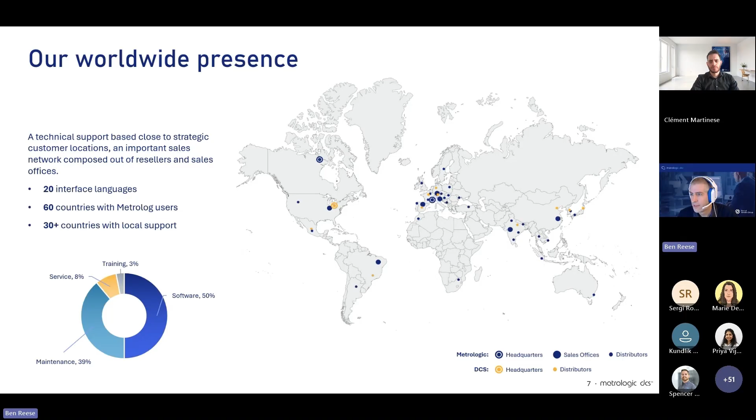It also means that we have a larger worldwide presence so that you'll be able to get services, training, expertise, and help locally where you are and in your local language. Together, we service every manufacturing industry from aerospace and defense through power and energy, consumer electronics, shipbuilding, even fusion and power creation with the ITER project in France.

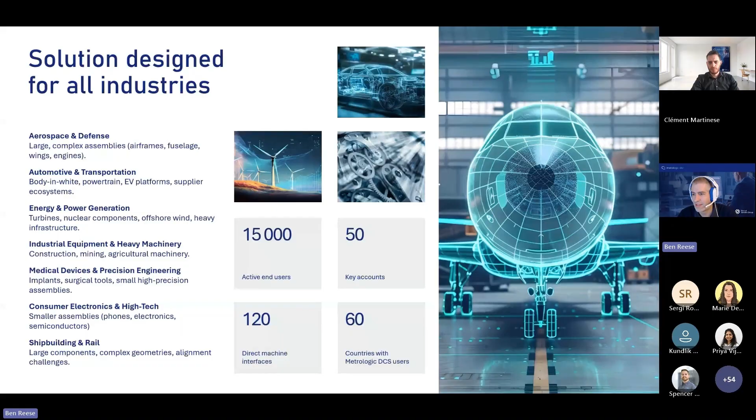And what we are going to be providing now as a combined company is a complete end-to-end solution from the design all the way through to manufacturing. And what this looks like, if I can get our GIFs going. There we go. What this is going to look like for you is the ability to optimize your designs early in the process, showing you not only where you might have risk factors in your product for manufacturing, but also showing you where you can optimize and make improvements.

This being fed into Planner, which is what today we'll be focusing on, will allow you then to set all of your inspection based on your model, following along that model based enterprise approach. Silma, of course, offline inspection and programming and simulation, and then Metrolog, as all of you have come to expect, will still be the powerhouse it is for inspection, reporting, and single part analysis.

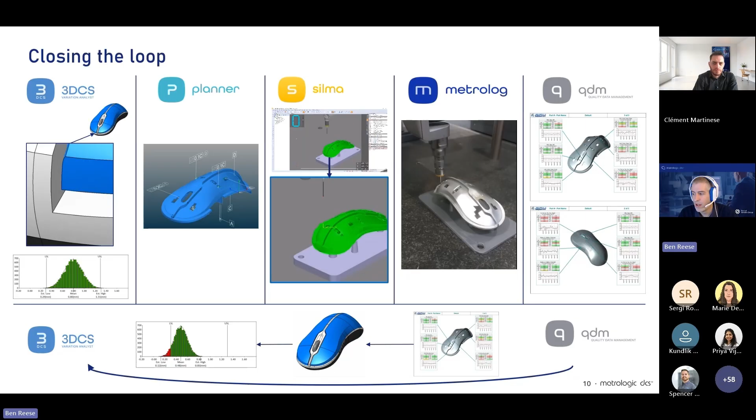And all of this data can be fed up into QDM or Quality Data Management Program, which then allows you to monitor it in real time, create reports, dashboards, even inline inspection screens so that as you're producing parts, you can see in real time whether they're meeting your specifications or not. And this can be fed back into 3DCS for root cause analysis and problem solving, utilizing that digital model.

Today, we've got two presenters to showcase the first part of the end-to-end solution, the 3DCS and Planner portion. Vishnupriya Vijay Kumar from our technical support team focused more on 3DCS, and then Clément Martinese, application engineer from the Metrolog side, will be showcasing Planner today for you. All right, so this time I'm going to let Priya take over. She's prepared some material for us to showcase exactly how 3DCS is going to prepare these components for inspection.

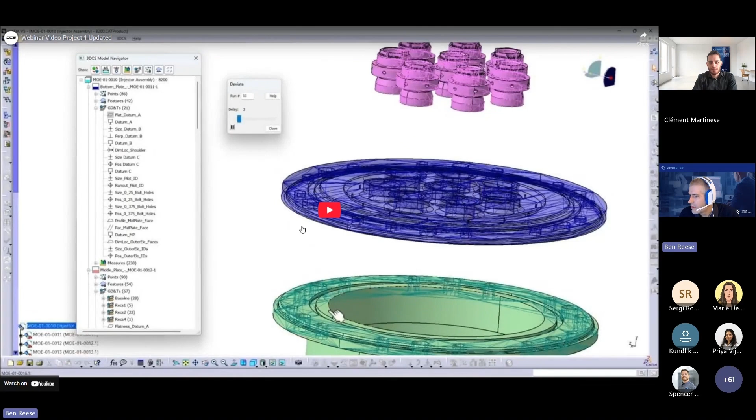Good morning, everyone. I'm Vishnupriya. So I'll be doing the 3DCS software demo today. So before we get into the actual demo, I have a couple slides here to go over to get you familiar with our 3DCS software. So what is 3DCS Variation Analyst?

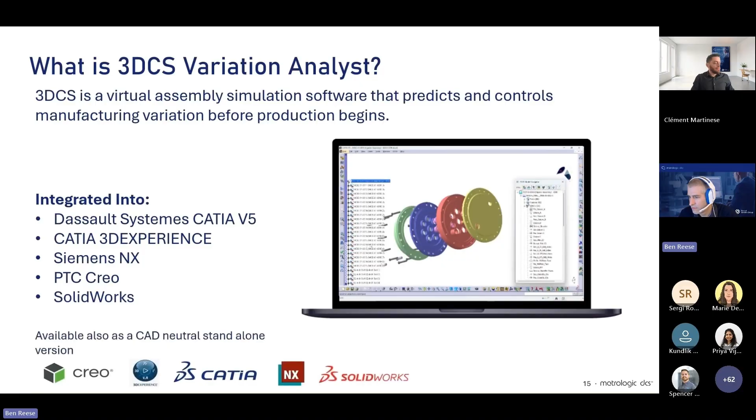So 3DCS is a virtual assembly simulation software that predicts and also controls the manufacturing variation even before the parts or the assembly get into the production level. As a software, we are integrated with the leading CAD platforms, which include CATIA V5, 3D Experience, NX, Creo, and SolidWorks. And we're also available as a CAD neutral standalone version.

So why do we use 3DCS? To explain this, it's nice to have a real example of a real world challenge of variation. No part is perfect. Any part that's output from production will have variation on the features, which includes holes, pins, surfaces, or fixtures. When these variations stack up, it leads to a lot of rework and scrap, because all the failures end up as scrap parts. And when you have to do a lot of rework, that delays the overall production process, which ends up with a lot of customer complaints.

So what's the real challenge here? These issues that we discussed are often discovered after the parts are built. So at that point, when you're trying to do any changes or rework, it's going to double the cost. And also you can't meet the timeline. This is exactly where 3DCS comes into the picture. All these failures can be predicted and this variation can be controlled with our software even before the production is actually started.

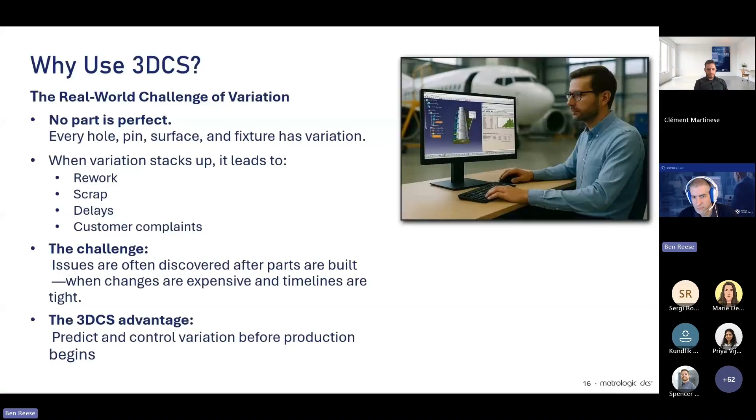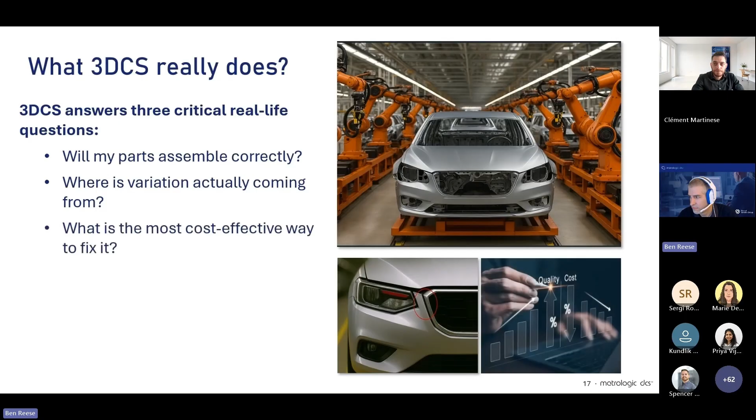So what does 3DCS really do? 3DCS answers three critical real-life questions. The first one, will my parts assemble correctly? If not, where is the actual variation coming from that's affecting my assembly failure? And third, what is the most cost-effective way to fix this without compromising the quality?

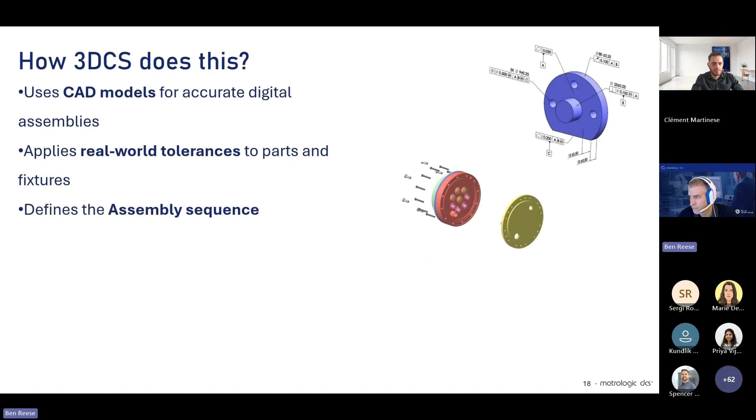So how do we do it? We get the CAD model for accurate digital assemblies. We apply the real-world tolerances to the parts and fixtures. We also define how the parts need to assemble by mimicking the real-life assembly sequence and run the statistical simulation, which is the Monte Carlo simulation, to mimic thousands of realistic builds. And finally, we provide the visual results and also the contributor analysis, where we pinpoint exactly where the problem is happening even before production is started. With that said, I'm going to switch to the demo.

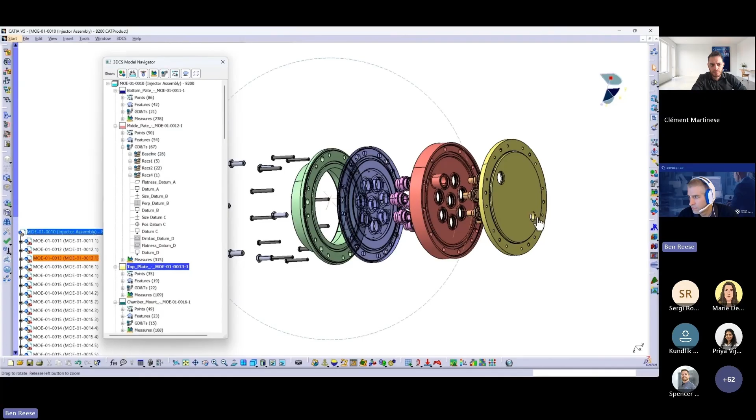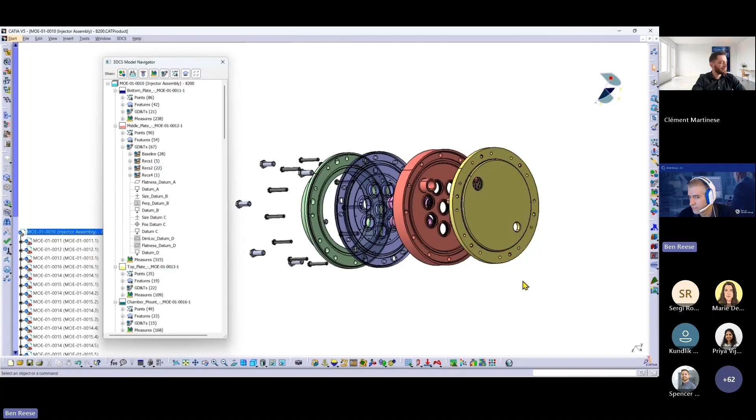All right, so I have 3DCS here integrated with CATIA V5. The 3DCS software comes as an analysis add-on workbench. For this demo, I have an injector assembly where we get the geometry from the CAD. This is a CATIA model, but this applies to any CAD platform that 3DCS is integrated with. We get the geometry from that respective CAD. Once we have the geometry, we start to add the 3DCS data, which includes the tolerances, the assembly sequence, and the measurements. All this information is added through the 3DCS tool.

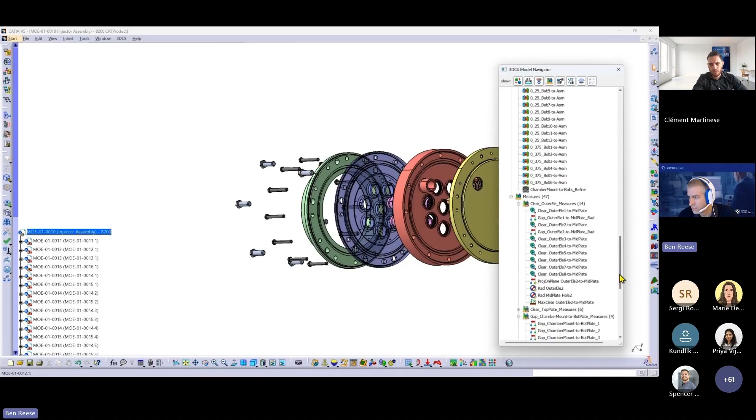So first, we have this 3DCS model navigator. In general, this mimics your CATIA tree, where we get the tree structure and the part name information from. And now we start to add our 3DCS data, which includes all these subfolders that you see within the part, where you can see the GD&T, the measurements, the moves, and a bunch of feature folders. These are all the data being added by the 3DCS tools.

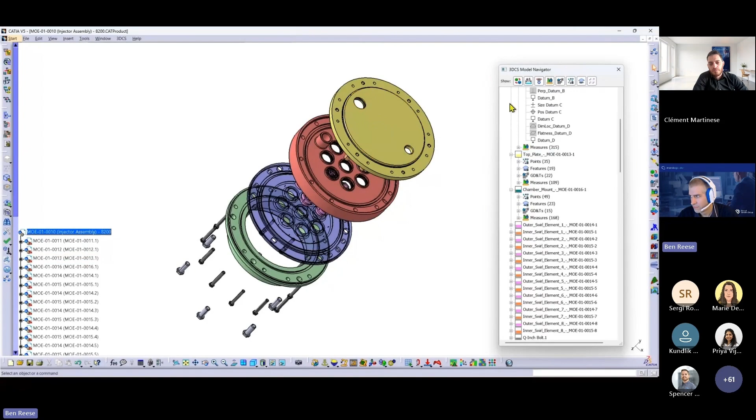When I say we add the 3DCS information, whenever a CAD surface is selected from the geometry, we create a mesh on that surface and we use that mesh for our analysis. To show that, if I turn on the mesh, now you can see these lines on all the CAD surfaces. These are the analysis mesh that 3DCS creates on the actual CAD surface, and we use that to simulate and produce our final analysis results.

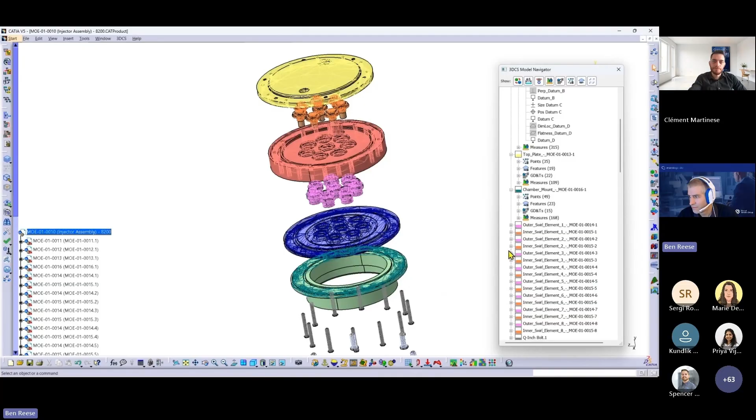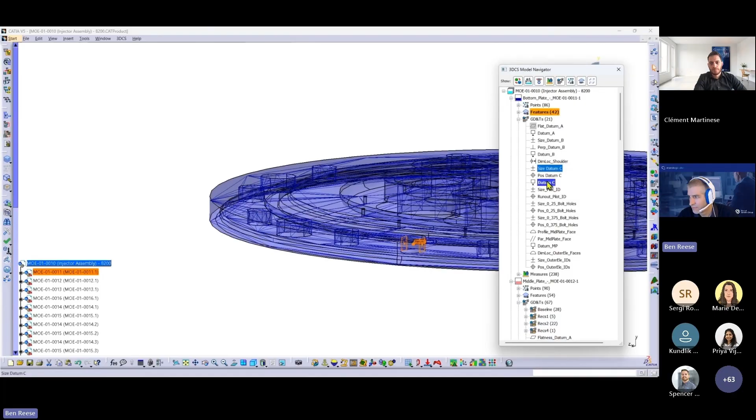To understand this more clearly, if I zoom into one of our parts here, and go into the GD&T folder of this part, I have a bunch of GD&T defined for this part right here. You can see by clicking on a GD&T, it highlights that mesh on this part. For example, if I open one of these GD&Ts, I have defined a surface profile on this with a range of 2.54.

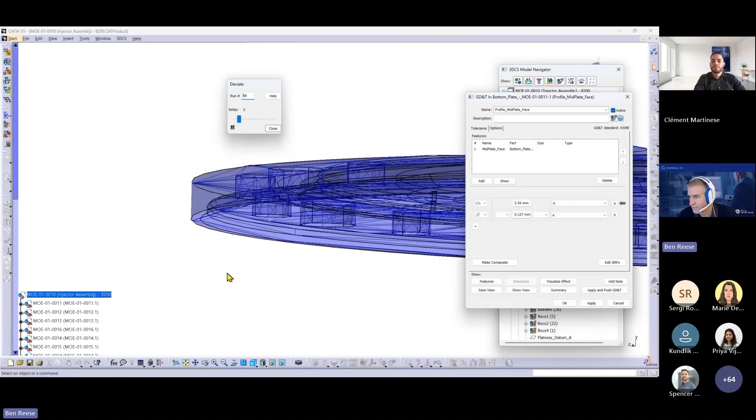If I zoom in here a little bit and hit deviate, it's going to show the variation that I have applied in the GD&T dialog visually by showing how that mesh is going to vary. In this way, a user will have an understanding of how that specific feature will vary for the applied GD&T.

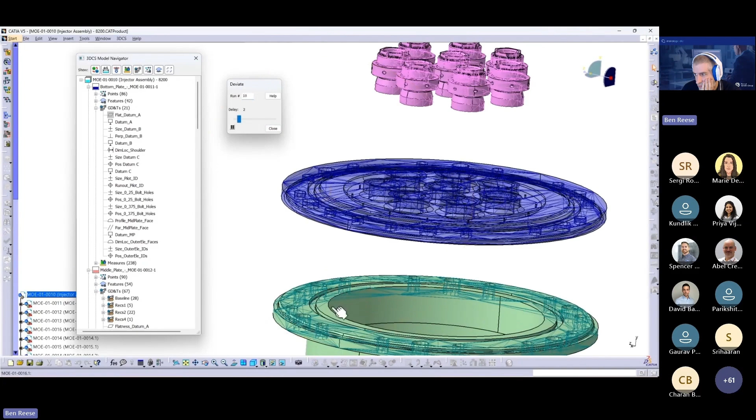So then similarly, if I zoom out a little bit, close this dialog, get this out of the way, and deviate it again, you can see the deviation is happening on all the surfaces that have variation in them. So now if I come in here and zoom into these surfaces, I can see there is a variation being applied on all these meshes. So wherever the mesh is moving or deviating, you can tell that these surfaces have tolerances defined by 3DCS.

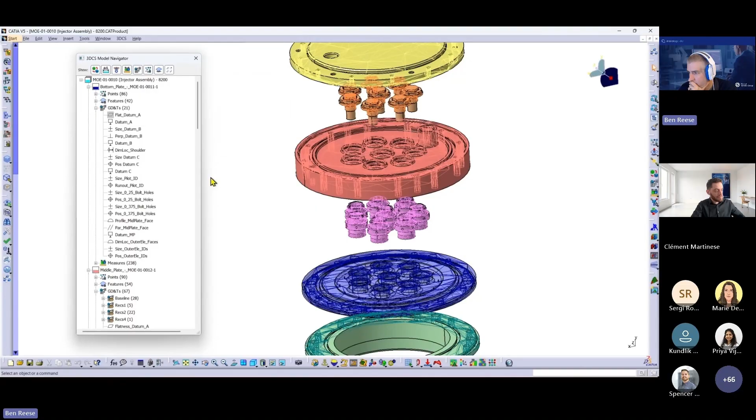So now after I have the 3DCS, I have the tolerance defined. So the next step is to define the assembly sequence. So here, if I come down in the tree, I have a folder that's called moves, where I have defined all the move sequences telling how the parts need to assemble with respect to one another.

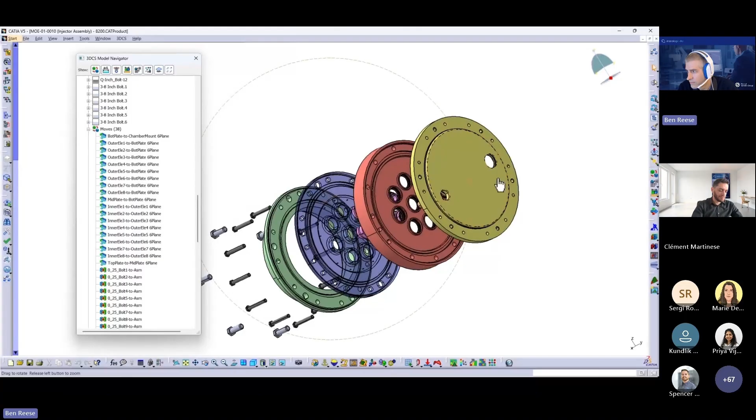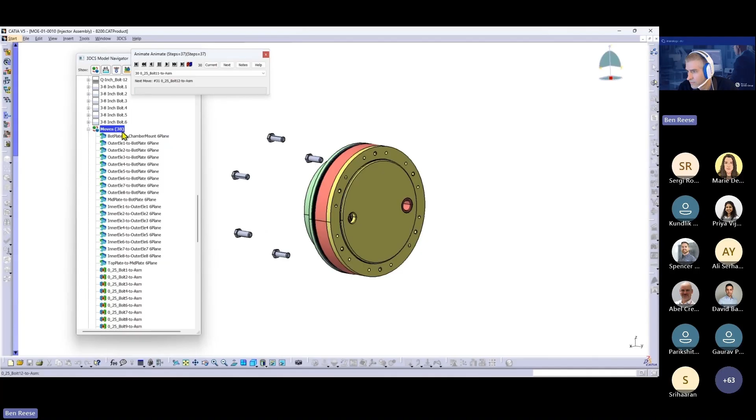So if I come in here, I hit the animate button. This will visually show you how the move, or the assembly sequence, has been defined within 3DCS. So what you see right now on the screen is nothing but the animation of all this set of moves that's been defined here within the move section. All right. So that's how the parts are getting assembled, and this is mimicking your real world assembly sequence.

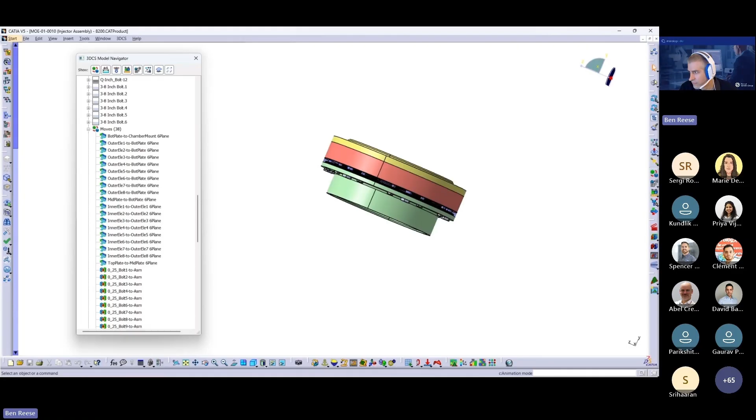So with that, the next thing I've created is the measurements. So now I have assembled the model, and I have the tolerances defined. So now I want to check if my assembly is building and meeting the expectation by creating some measurements for the specific measuring locations. So for that, if I separate the parts and go down in the list further, you can see these are the list of measurements that I have created. By just clicking on each measure, it shows where the measuring locations are.

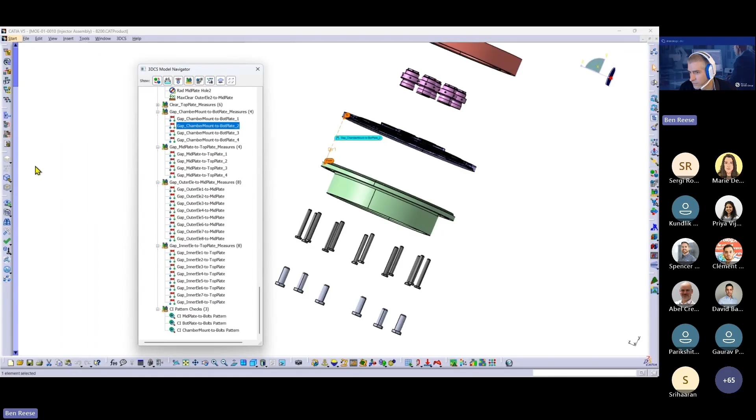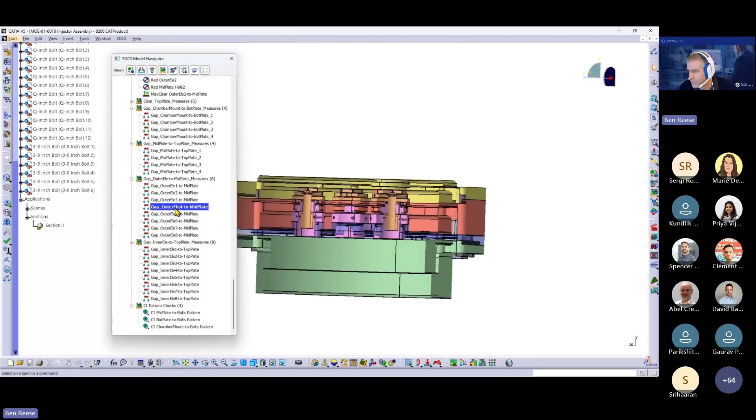But if I had to pinpoint one specific measurement here, I need to just take a quick cross section of the model. If I come in here, all right. So now if I assemble the model back again and get to one of the specific measurements, I'm trying to get to the gap measure here between these two parts. So if I zoom in here, I'm looking for this gap between the orange part and the pink part.

So at this position, if I deviate, you can see the gap between the orange part and the pink part growing and shrinking. So this is the mesh. This is the gap I wanted to check. And checking meaning I wanted to know that there is no interference going to happen between these two surfaces.

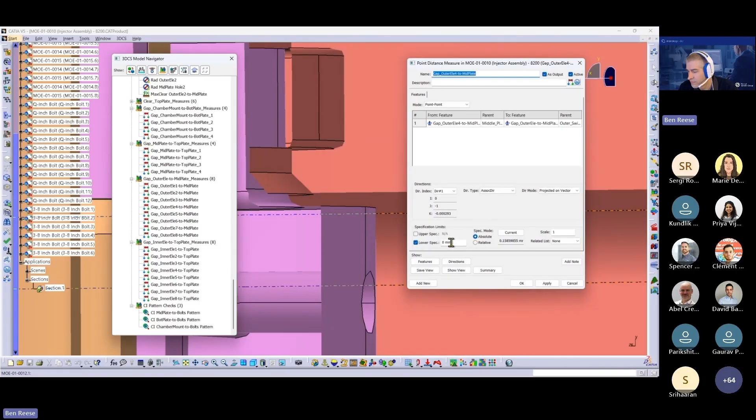So if I get into this measure, the measure dialog tells me the features that I'm using for this specific measure. And down at the bottom are the specification limits, and I have defined that none of my builds should go beyond 0, which means that no interference should happen. So this is what I'm checking by this measure.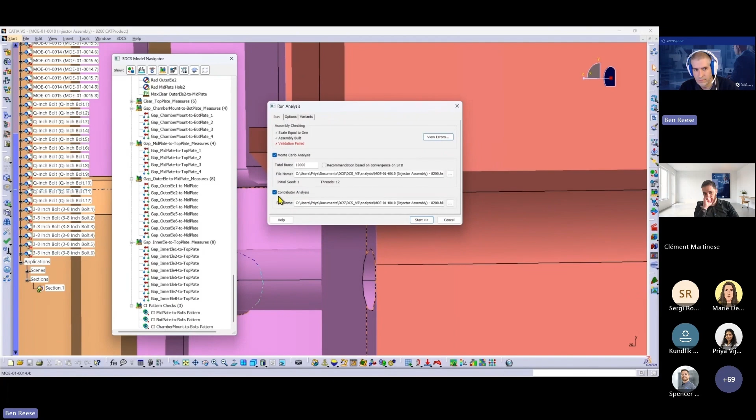So with that said, if I come back here, I'm going to nominal build and run the analysis. So this run analysis dialog is going to run the Monte Carlo analysis and also the contributor analysis. The number here that I have specified is going to mimic the number of realistic builds of the assembly, but I'm simulating it virtually by doing this analysis. So if I go ahead and run this,

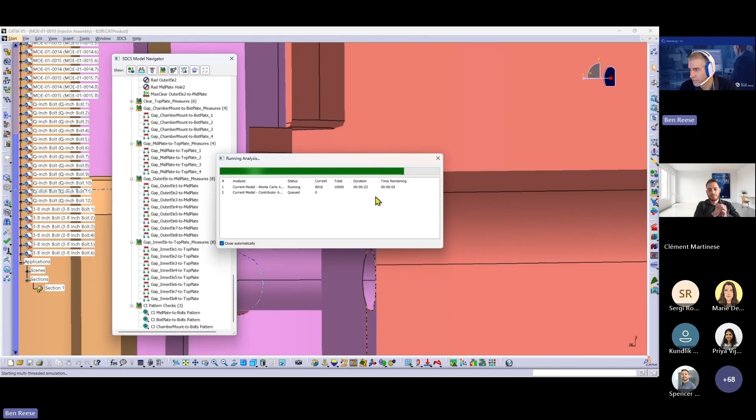all right, so now I have the analysis results for all the measurements that I have in the model. So if I go into the one that we are looking for, it's the gap measure between the plates right there. So for this measure, what the results are saying is, out of 10,000 builds that I ran, 17% of the builds failed, meaning I see a clash happening and the two surfaces were interfering 17% of the time. So this is what our Monte Carlo analysis results are saying.

And down at the bottom, we have the contributor analysis. This is nothing but listing out the tolerances or GD&T that were contributing to this specific gap measure. So the first one in the list is the top contributor, and you can see the percentage is gradually decreasing, meaning these are the impact of each and every tolerance on this specific measure.

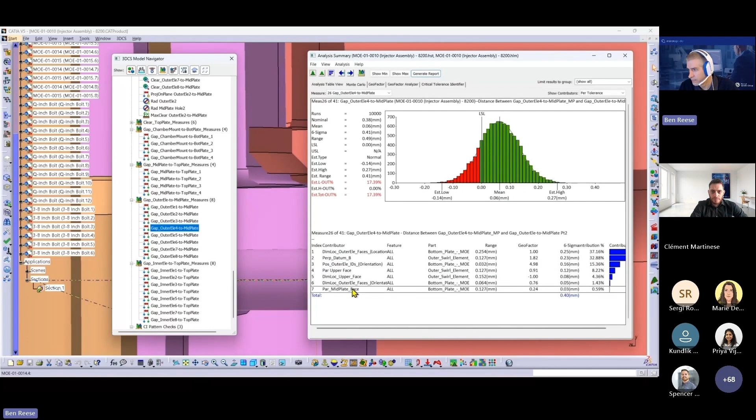So this is the information that we give to the user, from which the user can now decide how they want to take it forward. So if you want to improve your results by reducing the number of failures, the user can go ahead and tighten up the tolerance and give this information back to the design.

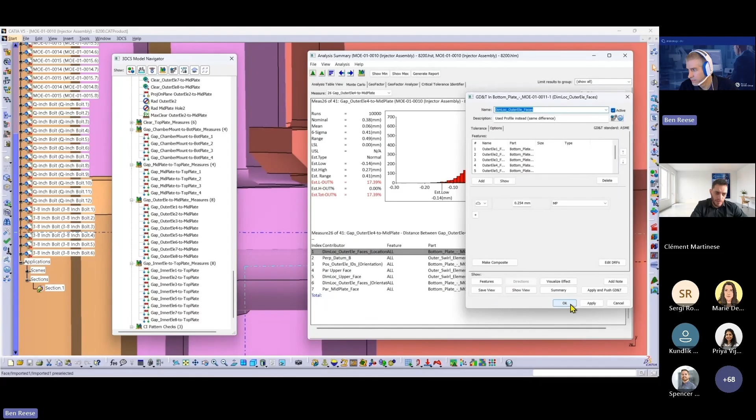So when this information is fixed, I go back to the model, go here. And now the reviewed and updated GD&T information that we got after running the analysis from 3DCS, this data would now be updated within the part. So now the part GD&T information would be updated based on the results that we got. And now this fixed part information would be given to the production team for the next step. So that's where I end my demo.

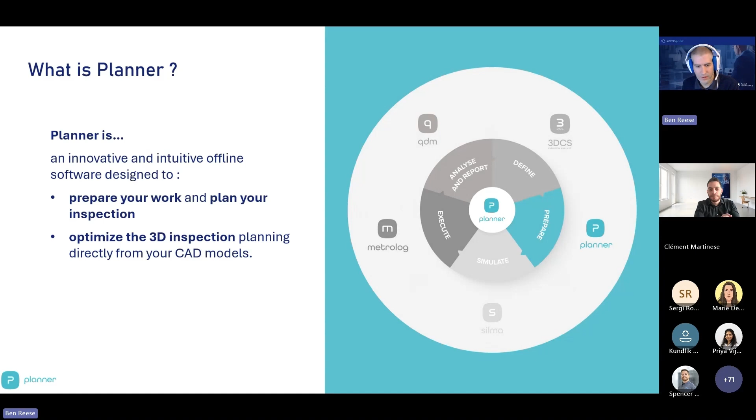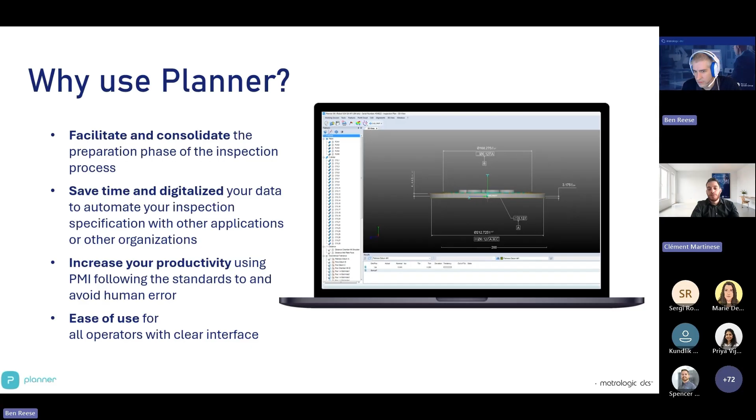So the first step when you open Planner is to open and import your CAD. You are able to import any CAD file. You are free to import any CAD format to stay fully compatible during your inspection flow. You are able to work with Creo, with IGES files, with CATIA in this example, SolidWorks maybe. So next slide, please.

So now when the CAD is open, the next step is to define all the characteristics to measure. Reminder, we are close to the design department, so we know what characteristic is important for my inspection. We have 2 solutions. The first one is to use a CAD with PMI. You just have to decode all the PMI, so you will get all the characteristics, all the datums, all the GD&T, and maybe all the views. If you have a view designed in CATIA, you can decode easily in one click all the features.

If not, it's not a problem. You just have to define yourself all the cylinders, all the planes, all the datums, all the GD&T from the 2D drawing, and you have to set all the information you need yourself. Next slide, please.

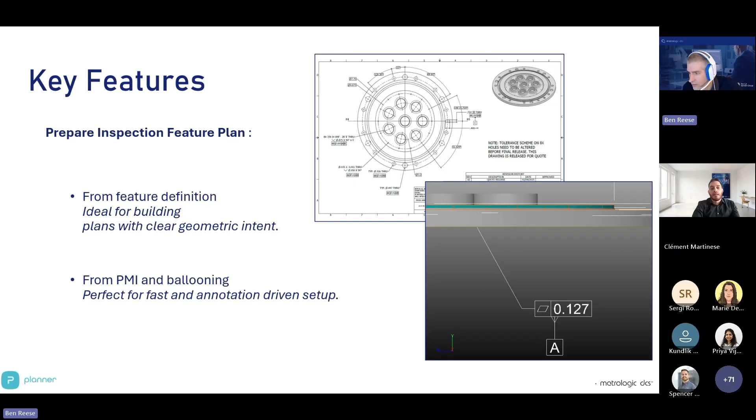Now focus on GD&T, it's an important thing. We have a clear interface to create your own GD&T. We have quick access to the standard to use, to the tolerance, to the calculation to set. And we have a window automatically updated depending on your setup. So it's easy to understand what's happening in the 3D in the window. And sometimes we think it could be not easy, it's complex to understand.

So we give you the possibility to check with the features relationship all the information about your GD&T, about the datum, depending on your GD&T. As you can see on this screen, you have the position GD&T, and you have all the information, all the datum, all the planes and cylinders depending on this position.

And we have also the scan GD&T to see the result at the end of the inspection, to see if the GD&T PMI is semantic or not. And at the end of the inspection, all the GD&T results will be in this area.

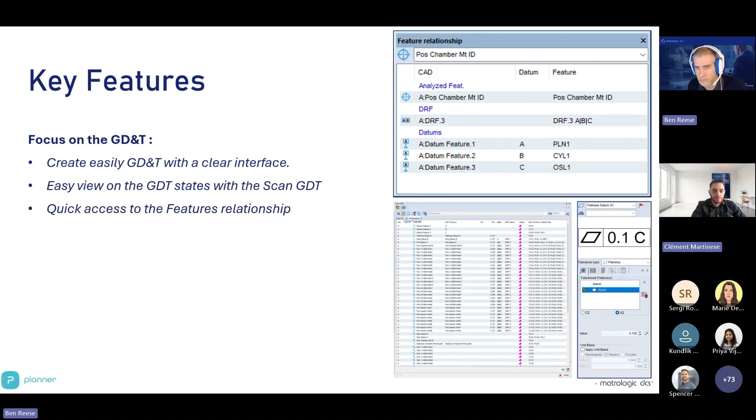Next slide, please. Thank you.

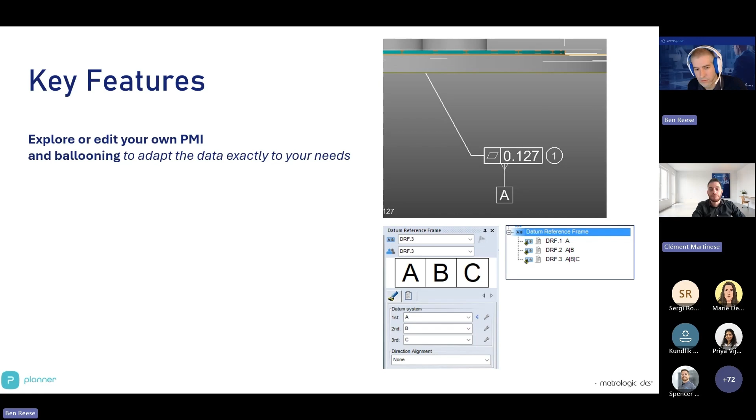As I said before, if you don't have PMI on your CAD, it's not a problem. You can create your own PMI easily with Planner with only one click. So the first step is to create maybe a plane, assign a flatness to this. And at the end, on the flatness, only one click to create the PMI. And you can also create the ballooning associated to the PMI to add, for example, a chart number, very important for the manufacturing process.

So now about the alignment, you can create with Planner all the alignments you need. It's automatically updated on the 3D view. So for example, you can create an alignment on a plane and circle and move, for example, the orientation on X, and it will be automatically updated on the 3D view to help you understand what's happening.

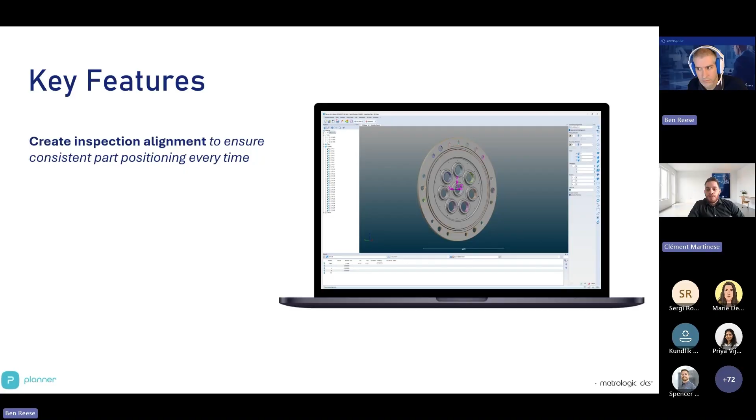It's time now for the first demonstration with Planner. So you can, yes. Thank you.

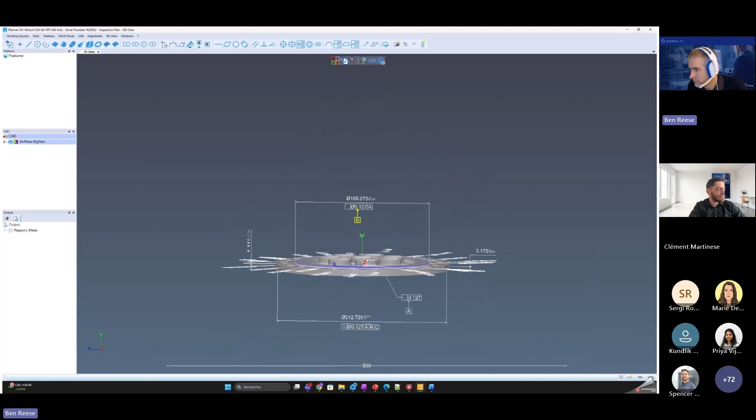With Planner, import any CAD file, any data such as CATIA, SolidWorks, NX, Creo, STEP, and so on. This keeps your workflow fully open and compatible. The CAD is instantly loaded with all PMIs if your base file contains them. Increase your productivity using PMI following the standards too, and avoid human errors. With the inspection plan collector, decode with only one click all the features, GD&T, and views. All the features are now in the features database.

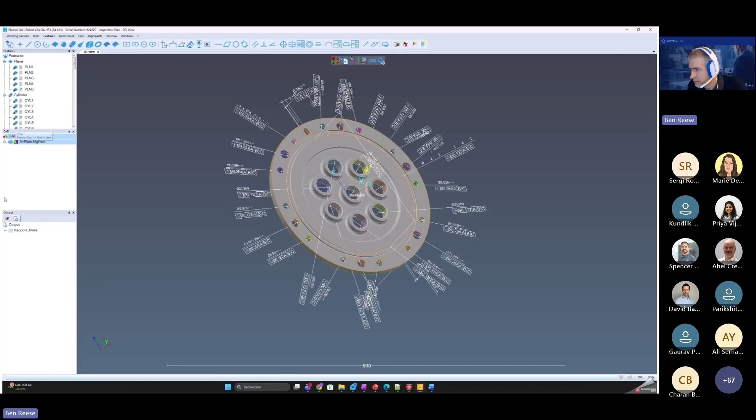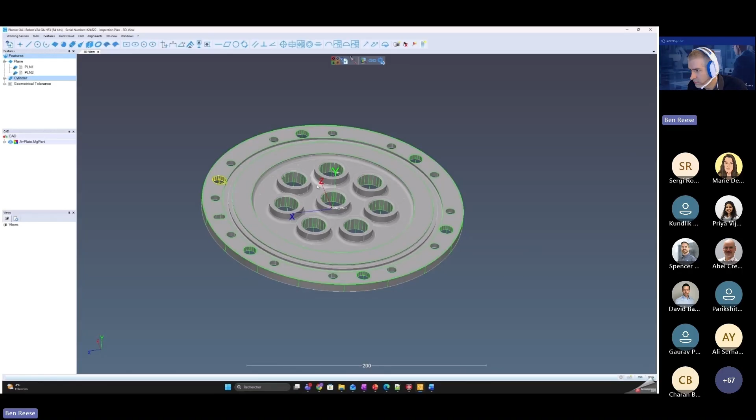If you don't use PMI now, don't worry. Define manually all the features and characteristics that you will measure next. Define the type of features and simply click on the CAD and the job is done. In order to comply with the 2D drawing specifications, easily assign a datum to your features. Here, let's assign datum A to my plane 1, for example. Select from the list which tolerance to create, and you are free to choose the elements in the 3D view or the database.

Now let's focus on the tolerances module. Easily define your tolerances either from the list or from the tolerances menu. Easily define your flatness, circularity, and position tolerance. Click on the 3D view or in the database to select the tolerance elements or your references. You have control over the tolerance value, the association criteria, such as least squares, Chebyshev, etc., and all other calculation parameters. You are in full control of the process. All the GD&T are available in the features database. Edit them at any time if necessary.

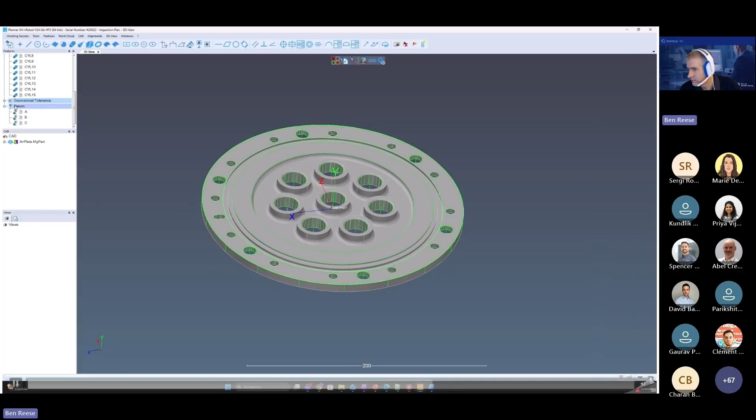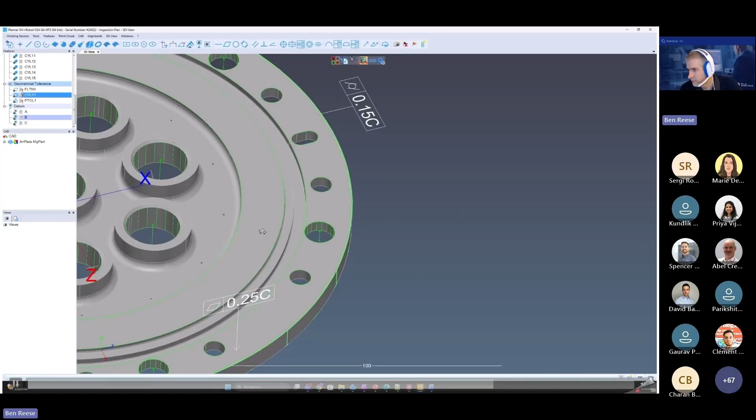With Planner, add PMI, Product Manufacturing Information, with only one click. For better visibility, add the datum and tolerances attached on your CAD. For even faster comprehension, add ballooning very easily. Ideal for finding your way around later. Relaunch an inspection plan collector so that the number is correctly decoded. You will find it in the results window attached to your item.

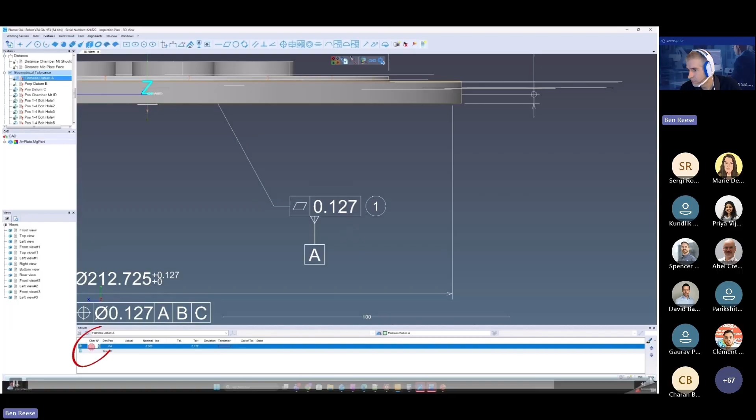Create any alignment with Planner. Based on reference features, orient and position your alignments so that everything is ready for the programming stage. Find and edit these alignments at any time in the database. The display is dynamic, allowing you to see in real time how your alignment will be positioned on your part.

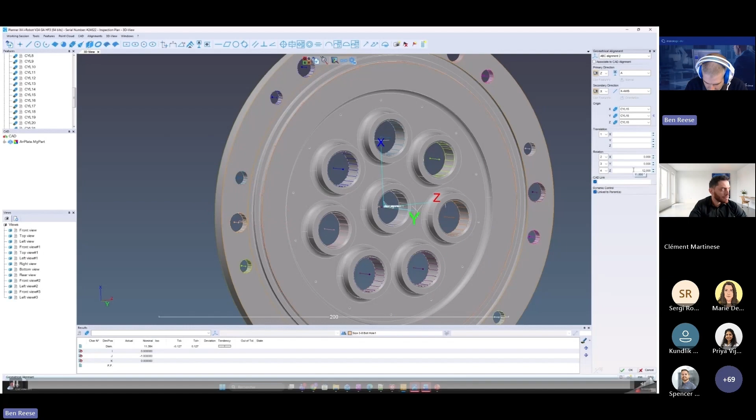Yes, thank you for this first demonstration. Now focus on the prepare view and stickers. As you know, decision making is important. The target is to understand quickly what's happened. So you can create your own view, your own stickers with a detailed view. For example, if you want to understand better what's happened during the inspection, you can create and customize as you want the view and stickers.

For example, create a specific view for all the cylinder results, a specific view for all the GD&T, and add the callout of each GD&T. And as you see at the bottom, in the right corner, you can create a specific detailed view to understand what's happened for your cylinder, and when the inspection is done, the view will be automatically updated with the real result.

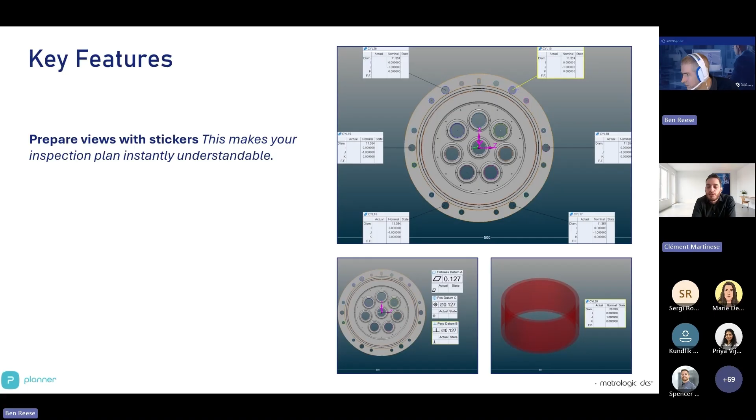Next slide, please, Ben.

And with Planner, you can also prepare your report. You can customize, like the stickers and the view, you can customize as you want. So prepare all your result table, all your background, all your view. And at the end of the inspection, like the view, like the cylinder, the report will be automatically updated.

So you have all the views, all the stickers, all the characteristics, all the reports embedded in only one document. And this document will follow all the steps of the manufacturing process. With Silma on step number 2 for the inspection programming, program creation, and after on what we call step number 3, when you execute your inspection on the real CMM.

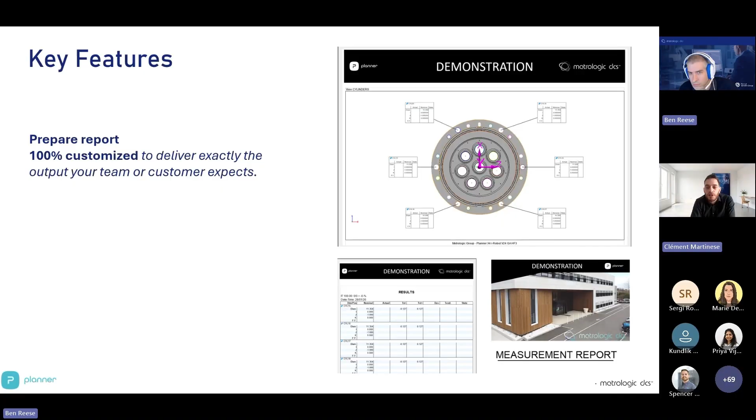Next slide, please. And now a quick focus on the export. So we have two possibilities with QIF. The first one is to open a QIF document with the working session, add some information in this QIF document. So, for example, some GD&T, some PMI, some ballooning. Export with a merge. So we merge all the information you imported before with the information you added with Planner. And at the end, you have an enhanced QIF document.

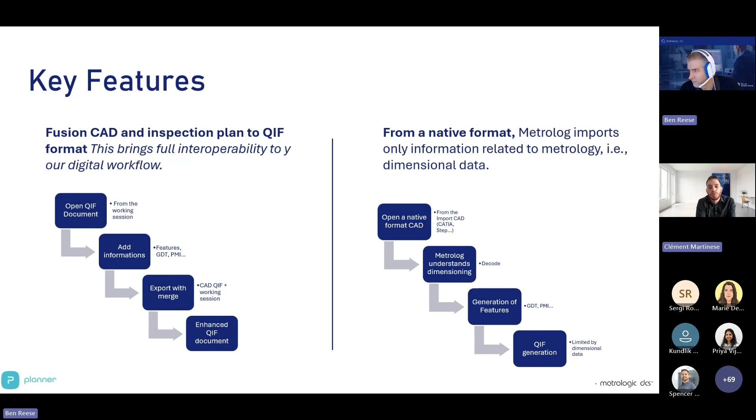Option number 2 is to import a native format, like we did before with the CATIA format. You can, with Metrolog, understand all the dimensioning data. So you decode all the PMI, all the GD&T. You will generate GD&T and PMI in the features database, and you can create a QIF for your inspection later. So we have two possibilities to work with the QIF format.

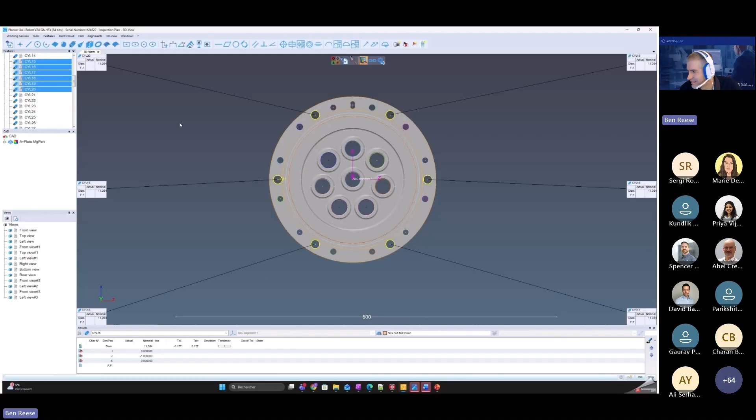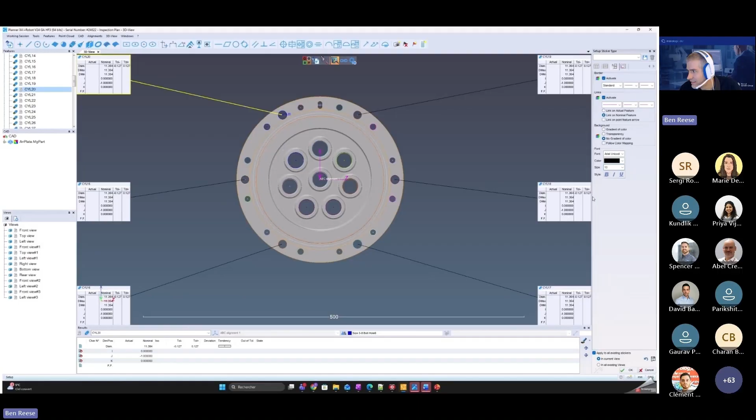Yes, it's time now for demonstration number 2 about the view and report. Planner allows you to create precise stickers and clear views to prepare your inspection report. Adapt and customize each label as you see fit. Drag and drop elements into the 3D view. Edit a label to display the information that is important to you, diameter, shape defect, and apply to all labels. You are free to change the font size, color, absolutely everything. Even save this profile for your future reports.

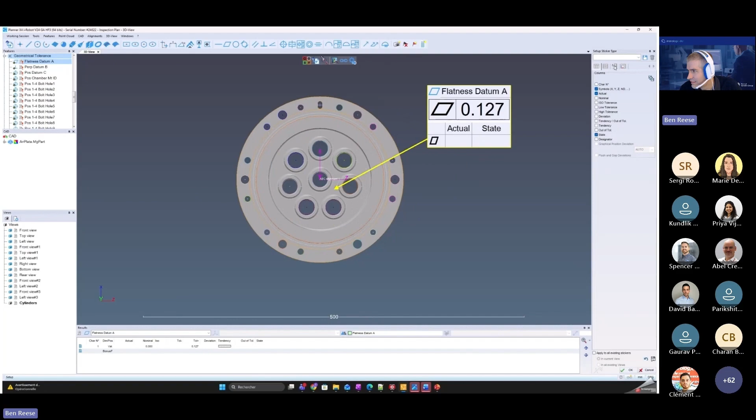When this is done, create a view that will be used for the inspection report. Create the number of views you want for a complete and quickly understandable report. In this example, a view specific to cylinders has been created, but let's also add a view for geometric tolerances for quick decision-making once the part has been measured.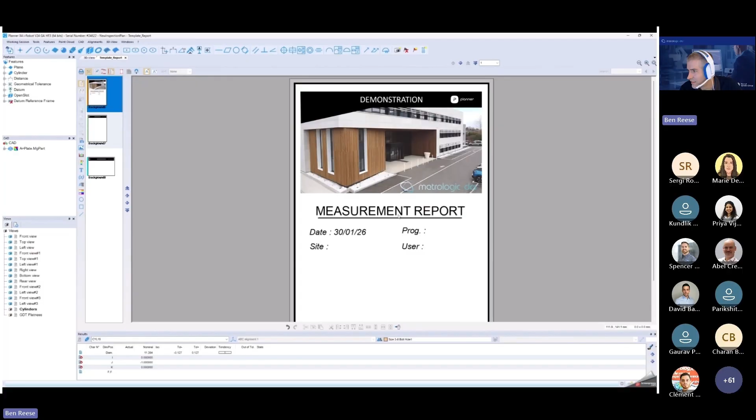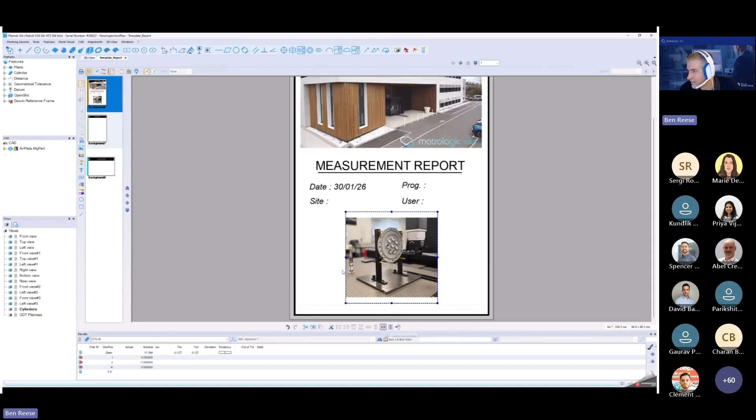One of the final steps is the control report. Here again, you have the freedom to customize the background of your report however you want. Add any photo, any information, any variable. Add the features and views you want and edit the table if necessary to display only the information you want. Drag and drop the desired elements or use the shortcut to generate a unique results table.

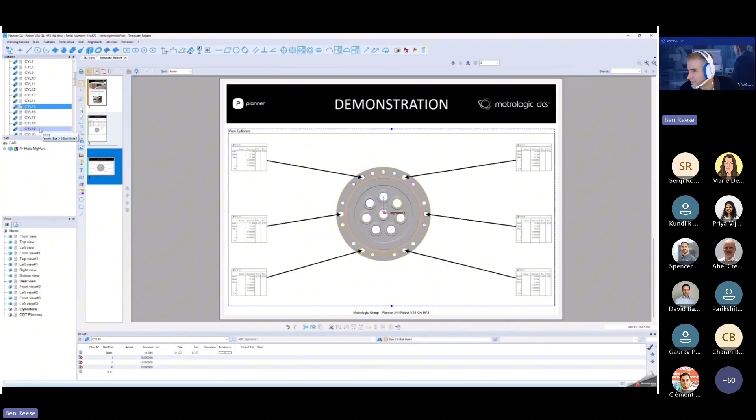The report is the final step. Planner offers the possibility of creating the report so that those in charge of programming and control no longer have to deal with this task. You are the one who knows your CAD and knows which features to highlight. At the end, get the report you want. This inspection report will be saved in the inspection plan.

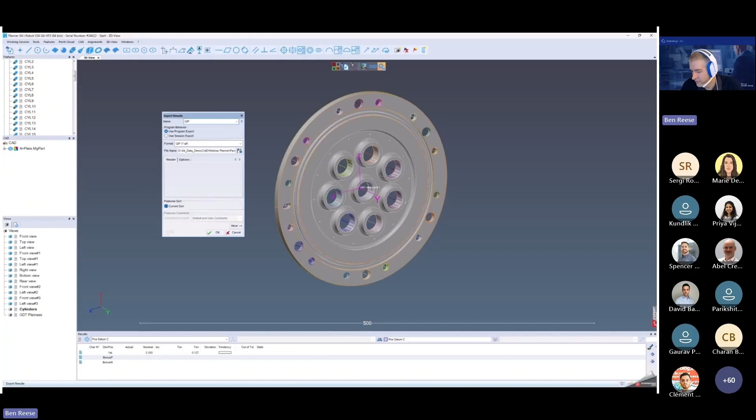Planner offers the ability to export data in several formats, including QIF format. From a native CAD format, CATIA in our case, Planner is able to understand and decode all dimensional information. Simply export your session to QIF format once all features have been decoded or defined. If another employee opens this QIF file, they will have access to all features, including GD&Ts.

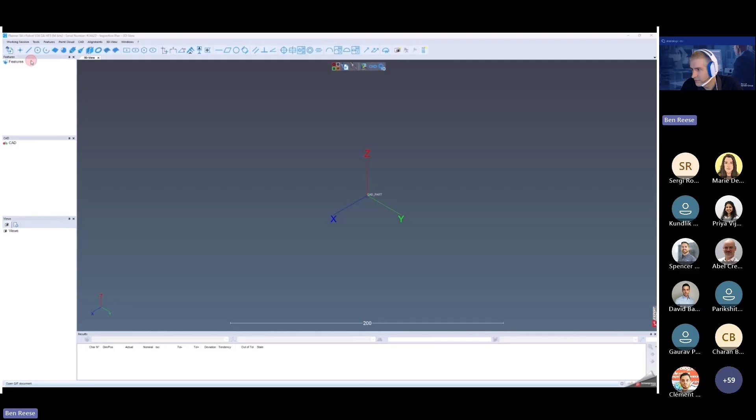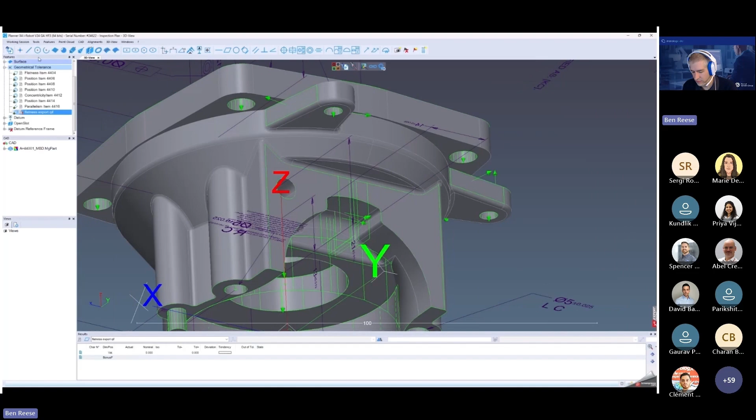Planner can enrich files in QIF format. This file in QIF format includes a CAD and several PMIs. It can be opened directly as a single document in Planner with the Open Document menu. It is entirely possible to add features or GD&Ts. If we add flatness, set all the parameters you want for this flatness and export this information, again in QIF format, enriched using merge data in the export options.

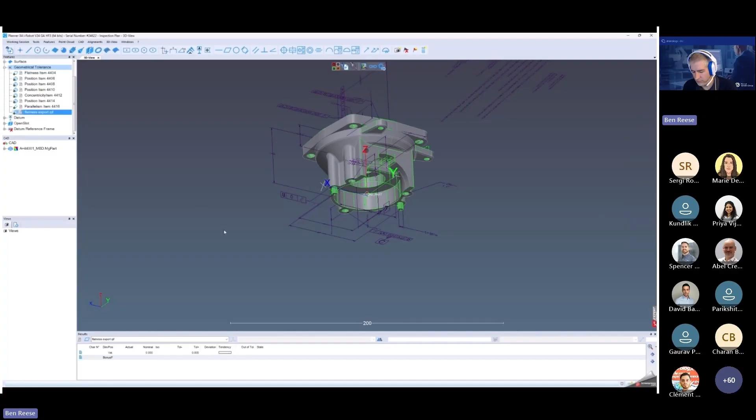As in the other example, if a colleague opens this document, they will have all the information, CAD and GD&T, as well as the recently added flatness. A quick way to share and export your data.